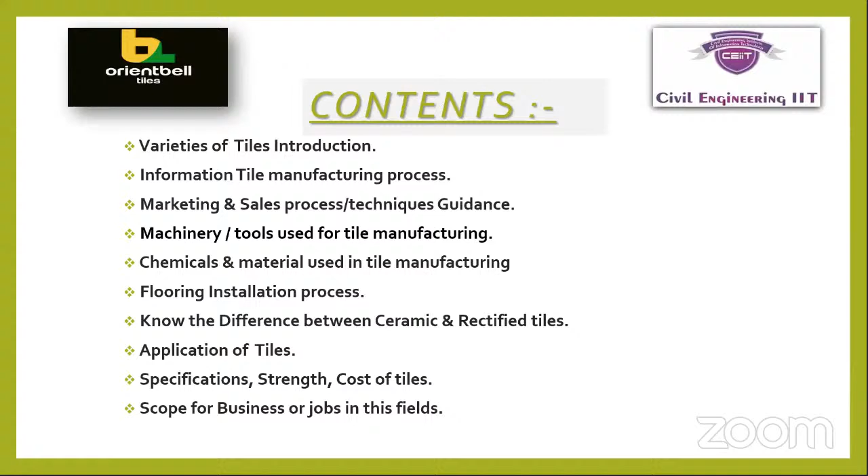We have a lot of students or learners in our institute, so they wanted to know what is the scope in this field for jobs or business. So we need your proper guidance, sir. So let's start the webinar here.

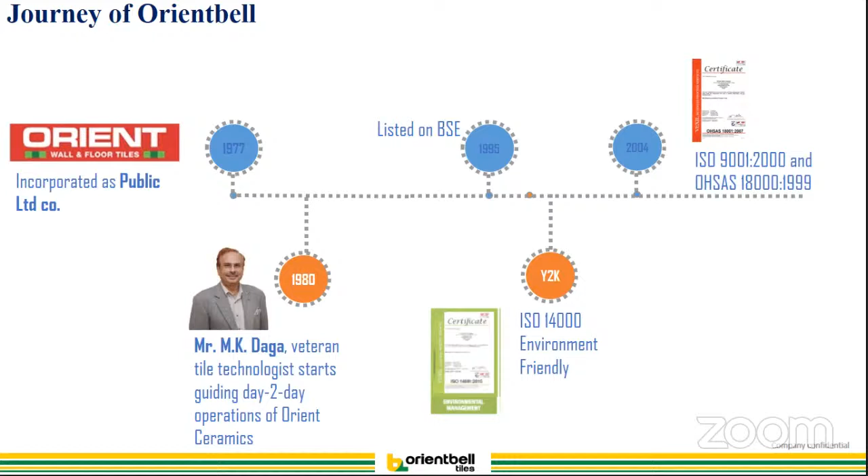So, Orient Company started in 1977. In 1980, our chairman, Mr. M.K. Daga, took control of the entire operations of the manufacturing plant, which is located in Sikandrabad, near Noida. In 1995, we listed our company on the BSE Sensex. In 2000, we were certified for ISO 14000, the environmental policy. In 2004, we were certified for ISO 9001 and OHSAS. These are the quality certifications.

And in 2005, we started our company-owned tile boutique. It is for the display of the tiles and from a sales perspective. Now we have almost 150 plus of these as well. In 2010, we, as Orient, acquired Bell company. Earlier, it was Orient Tiles Limited. Now it is Orient Bell Limited after the acquisition. In 2015, we certified our manufacturing process and product for ISI specifications, manufactured at the Sikandrabad factory.

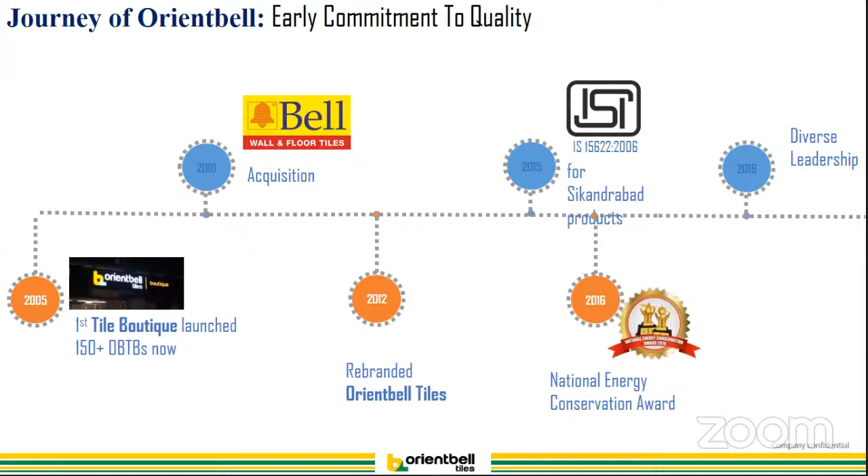So we are certified for quality certifications like OHSAS and ISO 9001. Plus, we are also a GRIHA member, and our product is certified for European export quality (CE). And our manufactured products are certified to Indian Standard specification IS 15622.

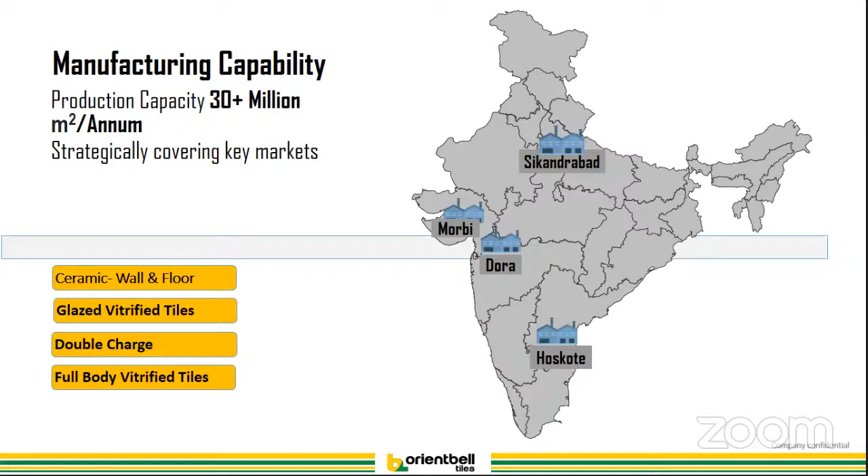So we have 4 manufacturing facilities. One is at Sikandrabad in UP, near Delhi. Second, we have a manufacturing factory at Hoskote. Third, at Dora. And fourth, we have 2 joint venture manufacturing facilities at Morbi. So we are making almost 30 million square meters per annum across all 4 manufacturing facilities. We manufacture ceramic wall, floor, glazed vitrified, double charge, and full body vitrified tiles.

We have almost 2,500 plus channel partners across pan India. We have a strong presence in the north, northeast, and also in the southern part. We have less presence especially in the western area. We are focusing on that part.

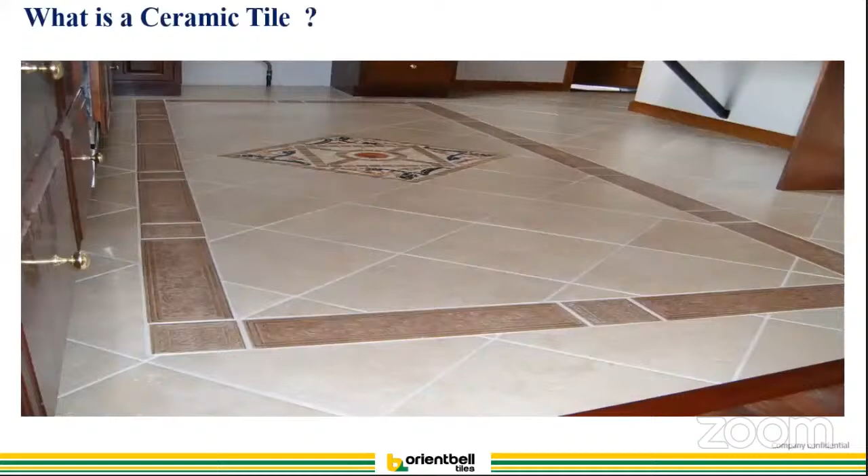So what is a ceramic tile? Everyone knows ceramic tile, but we don't understand what a ceramic tile is. Ceramic tile is actually a thin slab made of a mixture of clay and minerals, compressed at high pressure, then fired at a higher temperature, the surface applied with a glaze and decorative printing, and then fired to acquire the required strength. So this is the basic understanding. Ceramic tile is actually made of clay minerals, so it is a synthetic material, we can say.

Normally everyone compares it with stone or natural marble. But we cannot compare tile and marble or natural stone, because both are different. Marble and stones are basically earthy materials available in nature, whereas ceramic tiles are manufactured from minerals with a synthetic process. So there is a value addition in the process to convert it into a better look in comparison to stone or marble.

So what raw materials do we normally use? In any ceramic tile body, there are 3 major materials. One, clay. There are 2 varieties of clay, ball clay and china clay. Basically, it is a composite of alumina and silica formulations, with a certain water content in the clay minerals. Second, we use feldspar, a non-plastic raw material, again having alumina and silica as base chemical oxide components. And then we use a structural material, silica. Silica is purely SiO2, an oxide-based material.

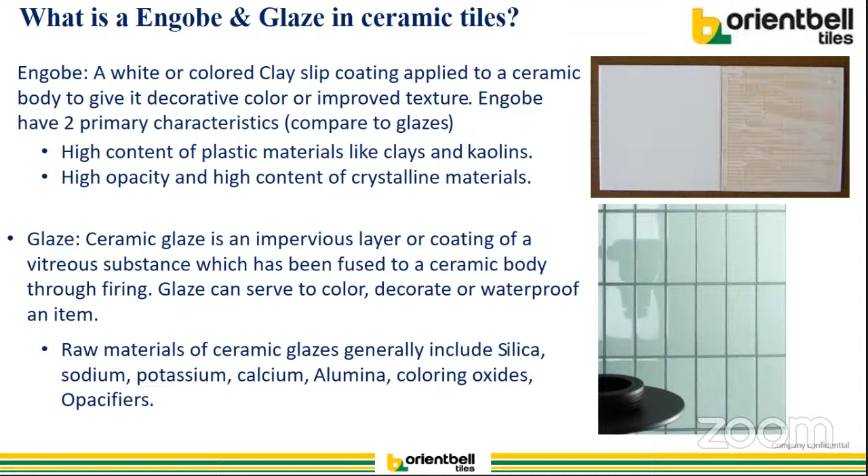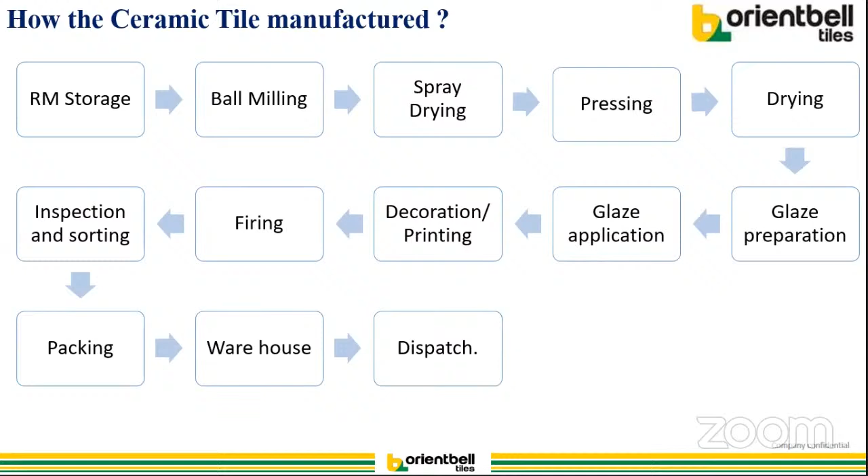Hello, sir. Sorry to interrupt, but you can explain the process in Hindi. It will be more comfortable and understandable for students. Yeah, noted, sir. If any mistakes in Hindi, please excuse me.

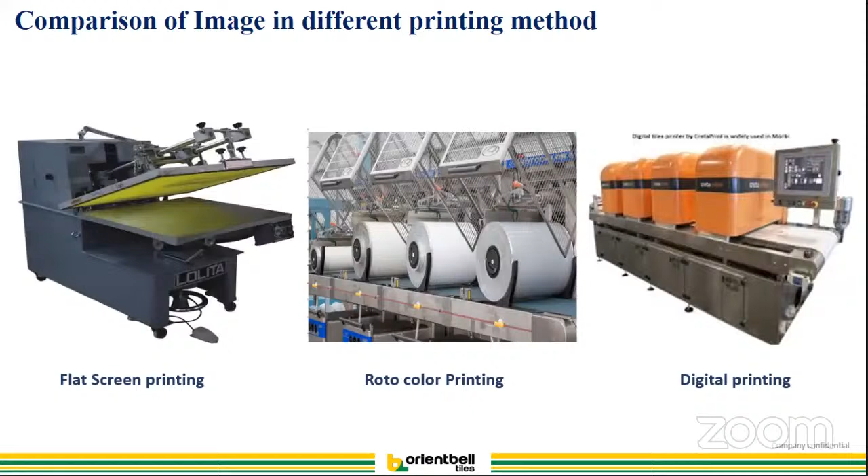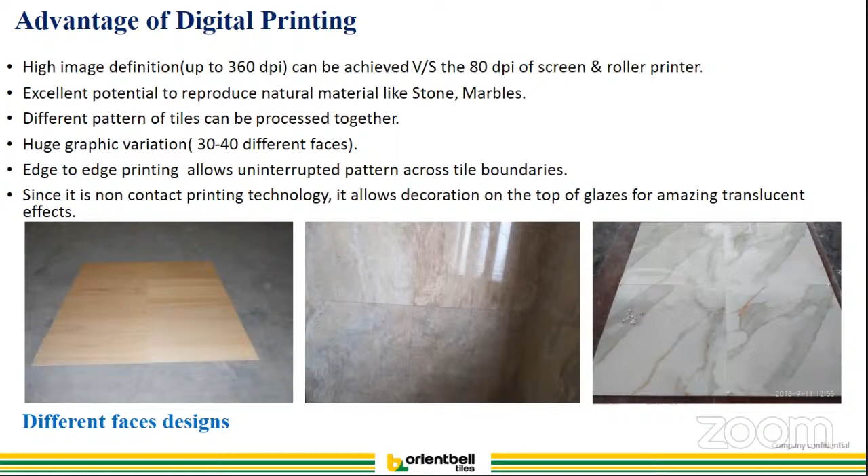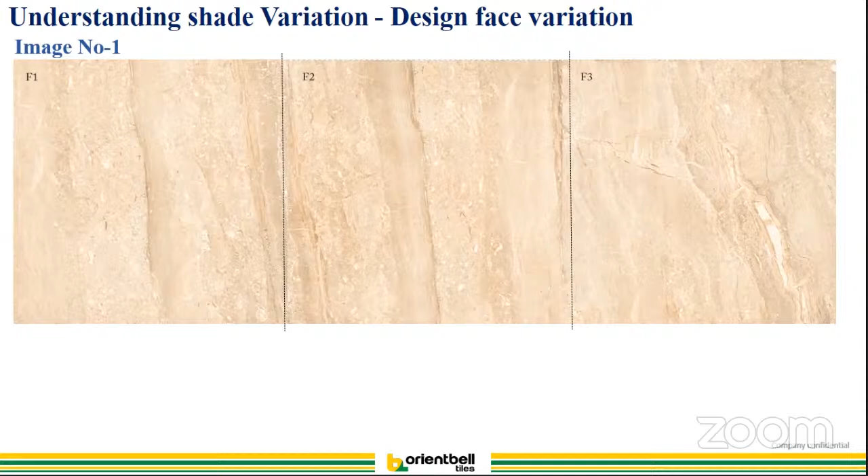बट डिजिटल प्रिंटिंग में आप हर बार एक नया इमेज प्रिंट कर सकते हैं, रैंडमाइजेशन कर सकते हैं, मतलब अलग अलग प्रकार का डिजाइन एट अ टाइम प्रिंट कर सकते हैं। तो वो एक एडवांटेज है। इसलिए टाइल्स में जो फेस वेरिएशन या रैंडमाइज्ड डिजाइन्स कहते हैं, वो एक पैटर्न मेजरली डिजिटल प्रिंटिंग का एडवांटेज रहेगा।

ये इमेज आप देख सकते हैं। इसमें भी आपका डिजाइन है, हर टाइल में अलग है, और हर टाइल में वो जो डिजाइन का पैटर्न है वो मूव कर रही है। इसको रैंडमाइज्ड पैटर्न कहते हैं।

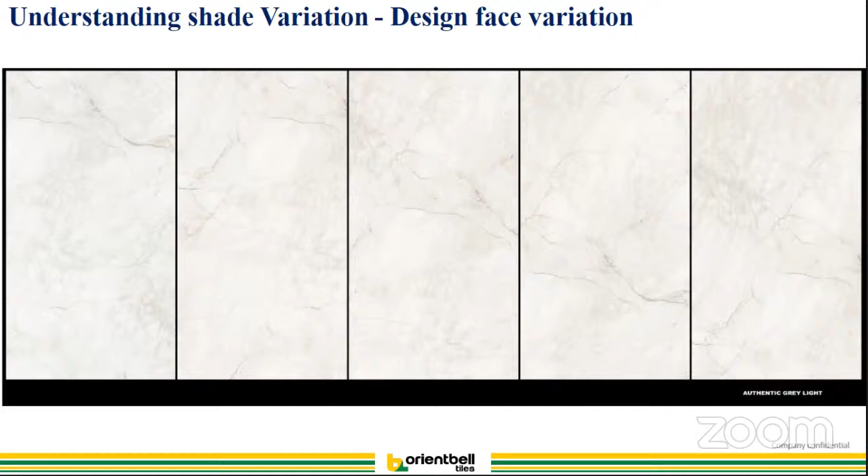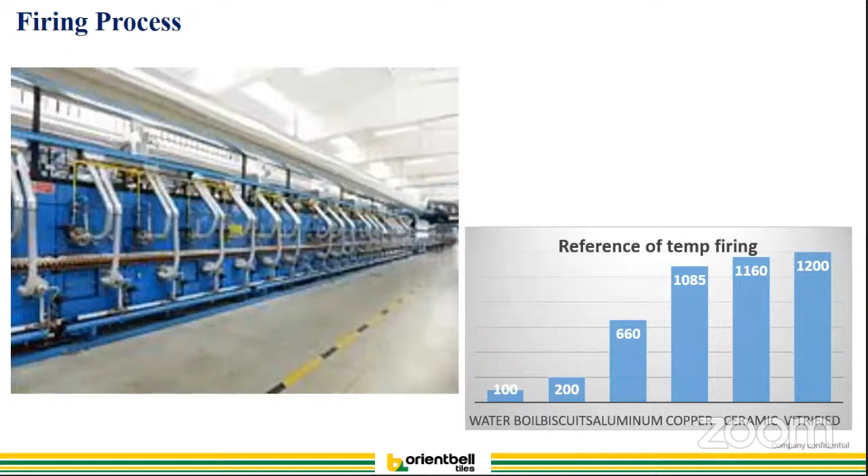दूसरा, जब टाइल प्रिंटिंग हो गया होने के बाद ये आगे फायरिंग के लिए जाएगा। फायरिंग के लिए किस टेम्परेचर पे जा सकती है - वॉल टाइल के लिए अलग टेम्परेचर है, सिरामिक फ्लोर टाइल्स के लिए अलग टेम्परेचर रहेगा, विट्रिफाइड टाइल्स के लिए अलग है, ग्लेज विट्रिफाइड टाइल्स का अलग है, क्योंकि जो भी रॉ मटेरियल यूज कर रहे हैं, जो फॉर्मुलेशन के हिसाब से प्रॉपर्टीज चाहिए।

वो प्रॉपर्टीज अटेन करने के लिए ये टेम्परेचर करेंगे। जैसे मैंने थोड़ी देर पहले भी कहा था, विट्रिफाइड ट्राइएक्सल बॉडी फॉर्मुलेशन में कम से कम 100 डिग्री से लेकर 150 डिग्री तक टेम्परेचर फ्लक्चुएशन मदद करेगा। जैसे जैसे टेम्परेचर इंक्रीज करेंगे, फॉर्मुलेशन के हिसाब से अपना बिहेवियर भी चेंज होता रहेगा। इसलिए इसमें प्रिसाइजली अलग अलग टेम्परेचर, अलग अलग टाइल के लिए यूज करते हैं।

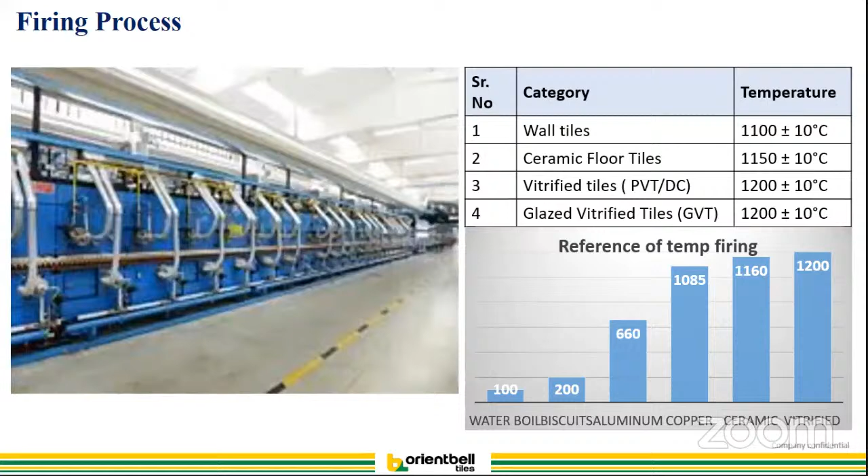जब टाइल किलन से बाहर आ जाते हैं, उसके बाद हम सॉर्टिंग लाइन पे भेजते हैं। सॉर्टिंग लाइन पे एक साइजर रहेगा, एक प्लानर रहेगा। साइजर टाइल का साइज ऑटोमेटिकली लेजर सेंसर के थ्रू मापेगा और उसी हिसाब से आगे टाइल को सॉर्टिंग करेगा। जो साइज हमारे टॉलरेंस के बाहर रहेगा उसको सेकंड क्वालिटी या थर्ड क्वालिटी में, सेट पैरामीटर्स के क्राइटेरिया बेस्ड पे ऑटोमेटिक सॉर्टिंग करेगी।

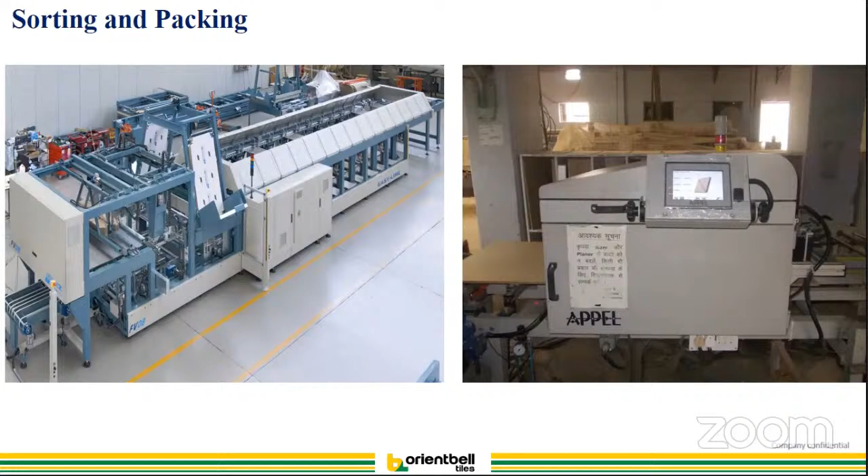इस प्रकार का उसमें डाटा आएगा, साइज आएगा, राइट एंगल्स मेजर करेंगे और डायगोनल भी मेजर करेगा, और पैरेलली इसमें सेग्रीगेशन भी होगा।

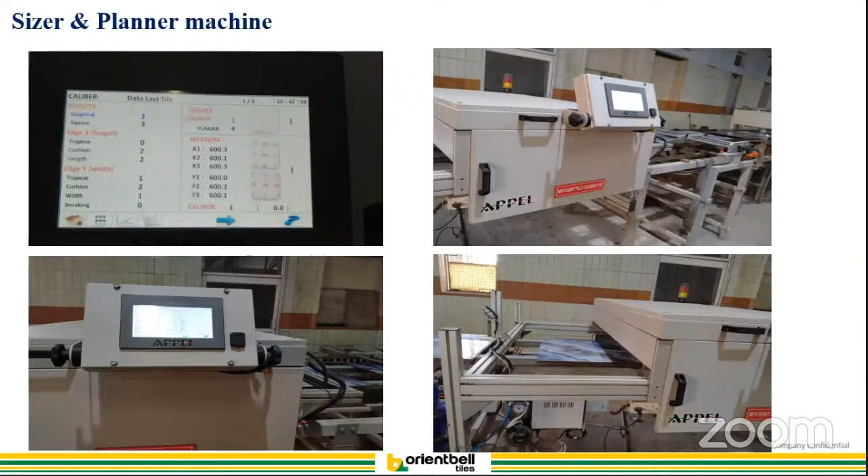इस प्रकार का बैच देते हैं ताकि फ्यूचरिस्टिक हमें बैच वाइज ट्रैक करने में आसान रहेगा। अगर कोई कस्टमर हमें कोई फीडबैक देता है, कोई बताता है इस बैच में ये दिक्कत आई, तो हमें इंटरनली अपना रिकॉर्ड्स वेरीफाई करने, वैलिडेट करने के लिए ये डाटा हेल्प करेगी।

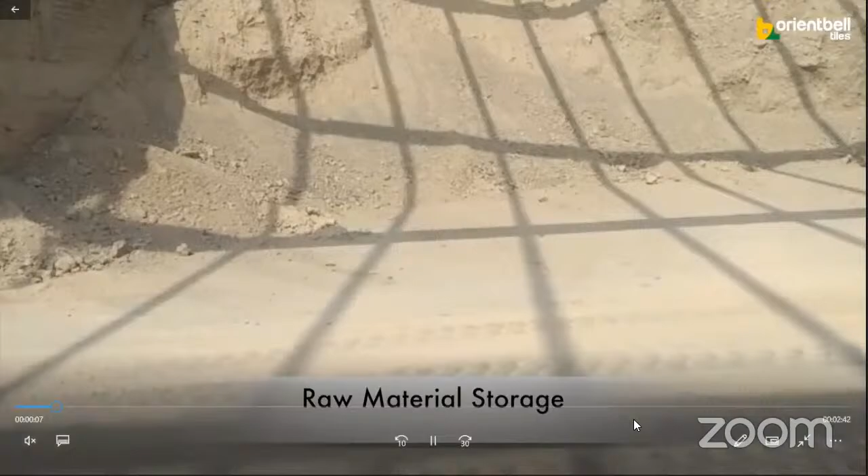आवाज आ रही है? भानु, आवाज नहीं है इसमें। जस्ट जस्ट जस्ट। Bhanu, we can't hear you. Yeah, just a moment, sir.

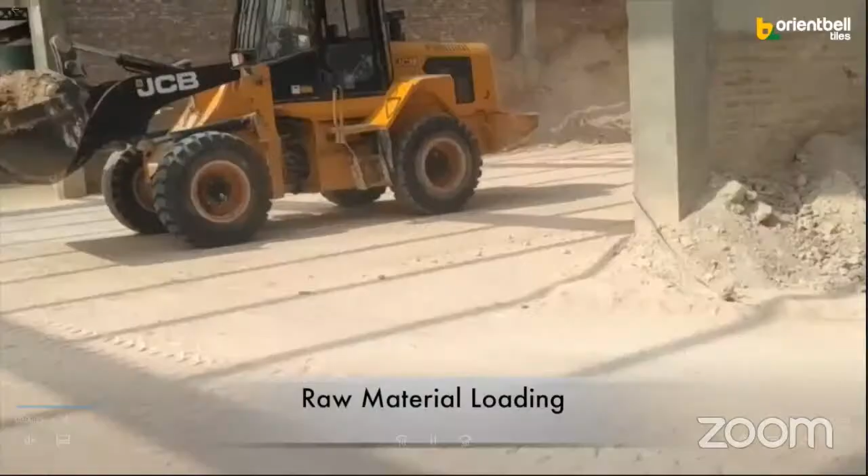I think there's some disturbance in the audio, but I will explain while moving forward.

ये रॉ मटेरियल का स्टोरेज है। इस तरह हम माइन से जो भी रॉ मटेरियल आती है उसको इस प्लेस में स्टोरेज करते हैं।

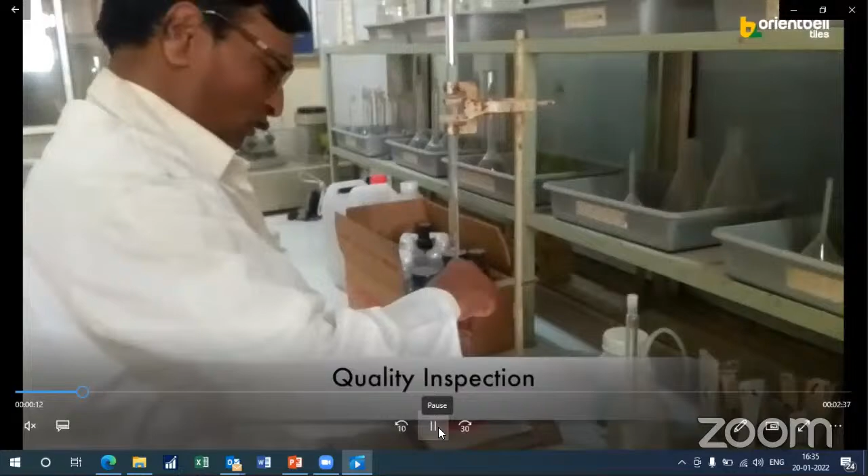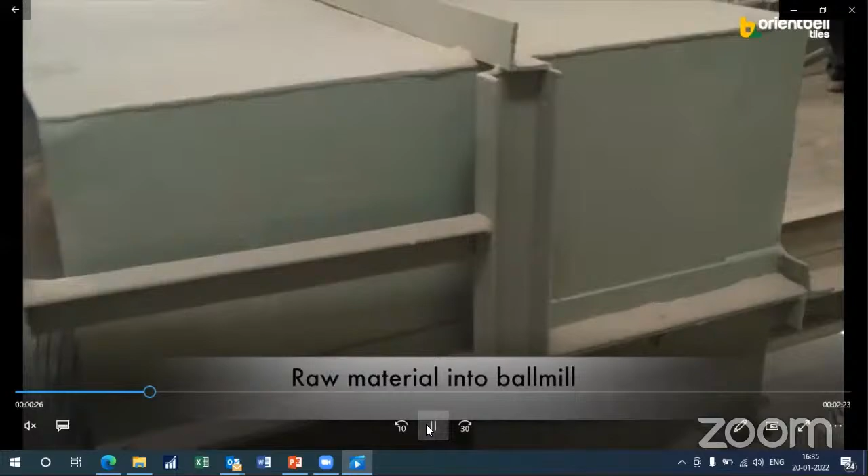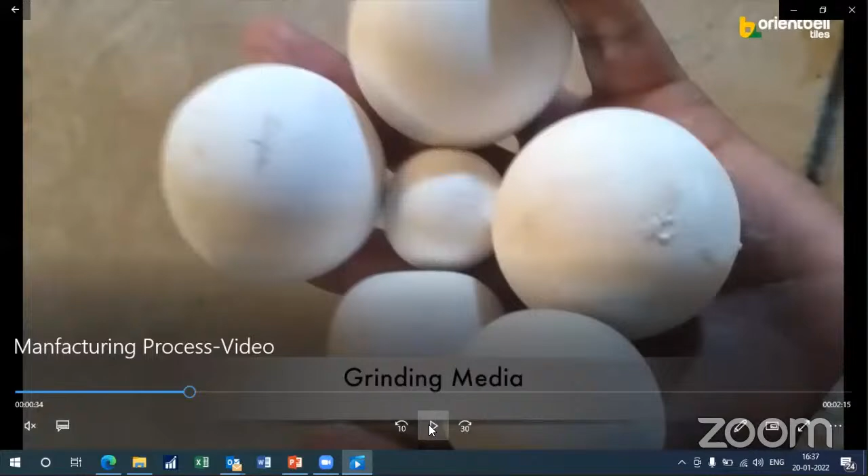और दूसरा, इस तरह का कन्वेयर के थ्रू हम बॉल मिल के अंदर लोड करेंगे। बॉल मिल का, जैसे मैंने बोला था, ये ग्राइंडिंग मीडिया जो बॉल मिल के अंदर रहती है उसको ग्राइंड करने के लिए है।

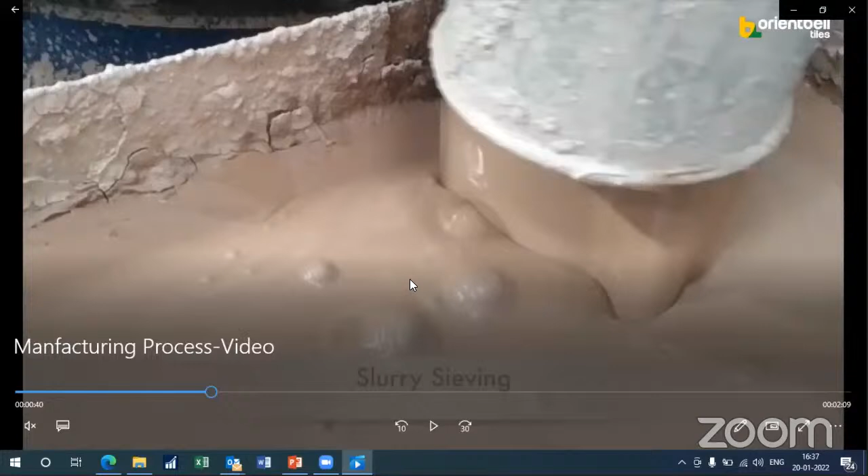जब बॉल मिल से हम डिस्चार्ज कर रहे हैं, डिस्चार्ज करने के टाइम पे इस तरह का स्लरी लिक्विड कंडीशन में रहेगा। अगर आप ये इमेज पे देख रहे हैं, ये सेमी सॉलिड कंडीशन में रहेगा। इसका जो स्पेसिफिक ग्रेविटी है करीबन 1.8 से लेकर 1.9 तक है।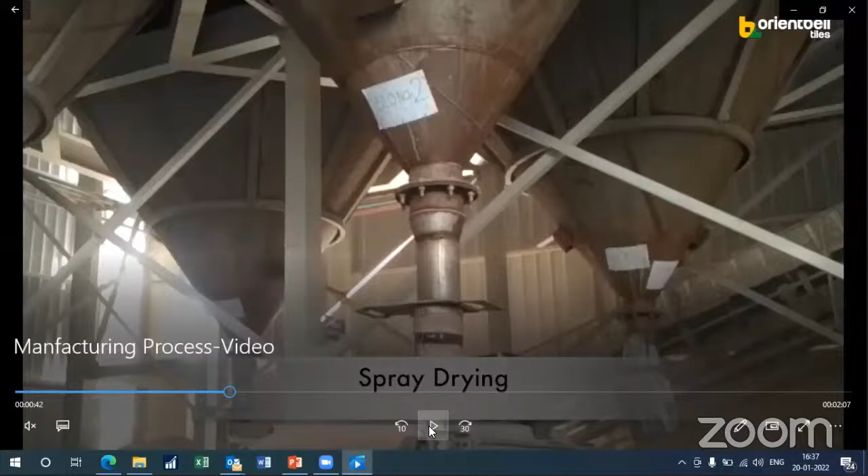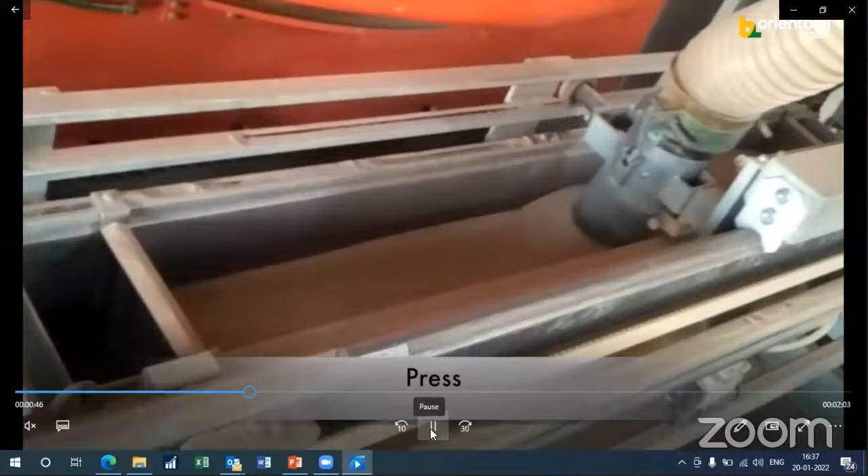ये स्पेसिफिक ग्रेविटी जब आप स्प्रे ड्रायर पे स्प्रे करेंगे अंदर, जैसे आप इधर देख रहे हैं, और ये जो पाउडर है, ये पाउडर फॉर्म में आ रहा है, ये पाउडर डिस्चार्ज हो रहा है, वो पाउडर को हम प्रेस में यूज कर रहे हैं। इसमें जो मॉइस्चर रहेगा, जैसे मैंने कहा था, 5 to 6% का मॉइस्चर रहेगा।

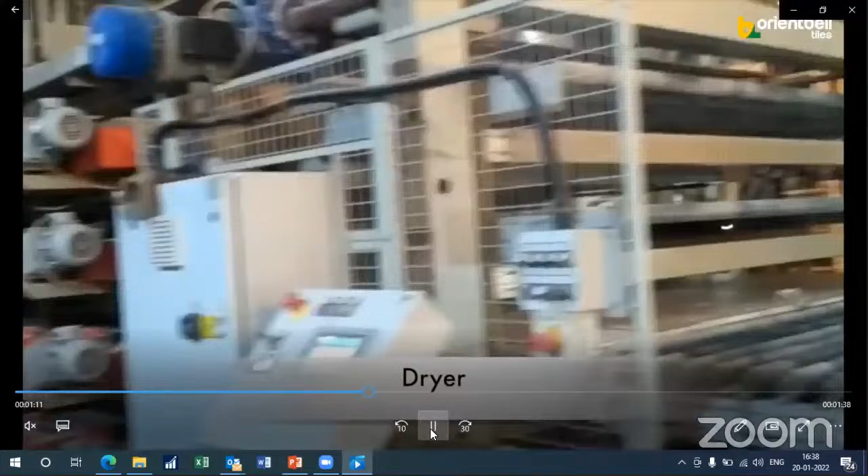ये कैविटी में भरेंगे। जब कैविटी में भर रहा है प्रेस में, और प्रेस से इसको मूवमेंट कर रहे हैं, हाइड्रोलिक प्रेस कॉम्पैक्ट कर रहा है, ये टाइल्स आपका रोलर पे आगे बढ़ रहा है। जब रोलर पे आगे बढ़ेंगे, इसको ड्रायर पे हम दे रहे हैं। इसका टेम्परेचर रहेगा 250 डिग्री तक। और ये जो 5 to 6% का मॉइस्चर है, 1% के अंदर लेके आएंगे विदइन 20 to 30 मिनट साइकिल पे। इसके बाद ये डेकोरेशन पे जा रहा है, ग्लेज लाइन पे।

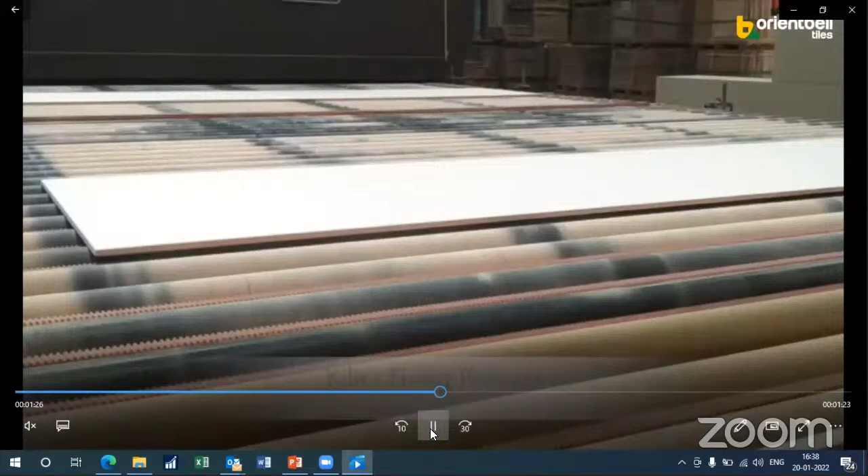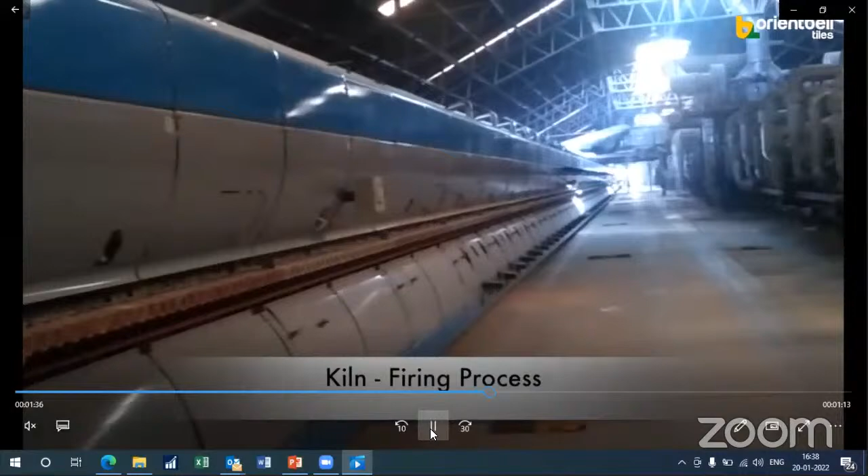जैसे ग्लेज इस तरह का लिक्विड में स्टर करेंगे, और ये किल्न के अंदर फीडिंग के लिए जा रही है। आप रोलर मूवमेंट देख सकते हैं, जो टाइल कैसे रोलर के ऊपर चल रहा है। और रोलर से टाइल बाहर आ गए।

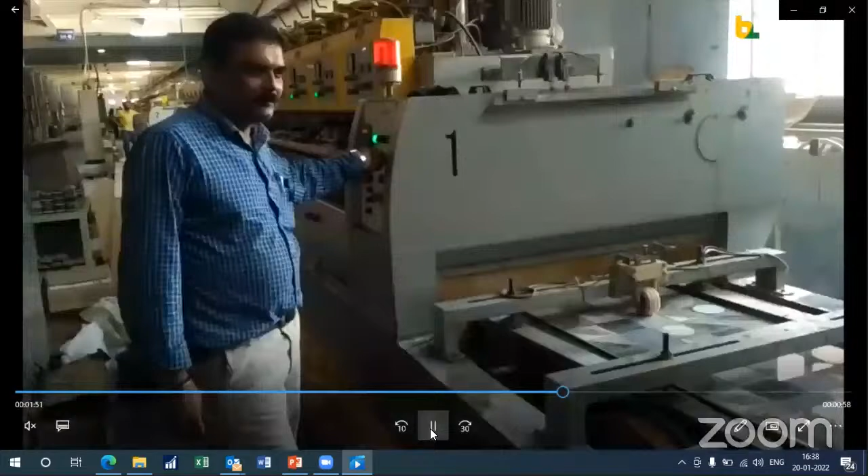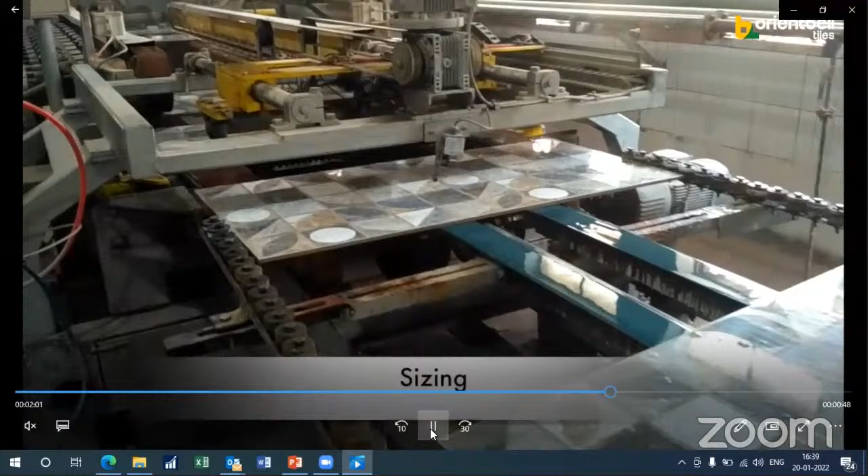ये किल्न का साइकिल करीबन 40 मिनट से लेकर 50 मिनट का रहता है। इट मे वेरी ऑन द प्रोडक्ट टू प्रोडक्ट साइकिल। अब टाइल जो है पॉलिशिंग लाइन पे जा रहा है। इस तरह का हम टाइल सरफेस को पॉलिश करते हैं ग्लॉस लाने के लिए। और उसको टाइल को रेक्टिफाई कर रहा है। रेक्टिफाई मतलब नॉमिनल साइज के हिसाब से टाइल को फिनिशिंग कर रहे हैं।

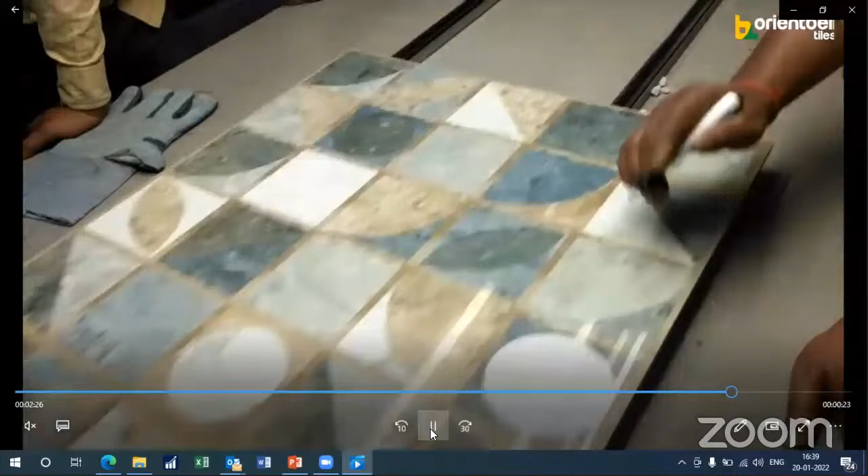जैसे मैंने बोला था, साइजर ऑटोमेटिक सॉर्टिंग करेगा टाइल को, साइज और रेक्टेंगुलरिटी और डायगोनल वेरिएशन को लेके। उसके बाद सरफेस का कोई विजुअल डिफेक्ट होगी, इस तरह का दो आमने सामने सॉर्टर्स रहेंगे, वो मैन्युअली विजुअल डिफेक्ट को सॉर्टिंग करेंगे। इसके बाद जो उसका पैकिंग होगा स्ट्रैपिंग के साथ, और इसको पैलेटाइजेशन करते हैं। पैलेटाइजेशन के बाद थ्रू फोर्कलिफ्ट मटेरियल जो है वेयरहाउस का स्टोरेज और ट्रक लोडिंग पे मूवमेंट के लिए लेके जाए।

ये हमारा मैन्युफैक्चरिंग प्रोसेस है। मैं एक बार इसको रन कर रहा हूँ, ताकि आप लोग एक बार और देख सकें।

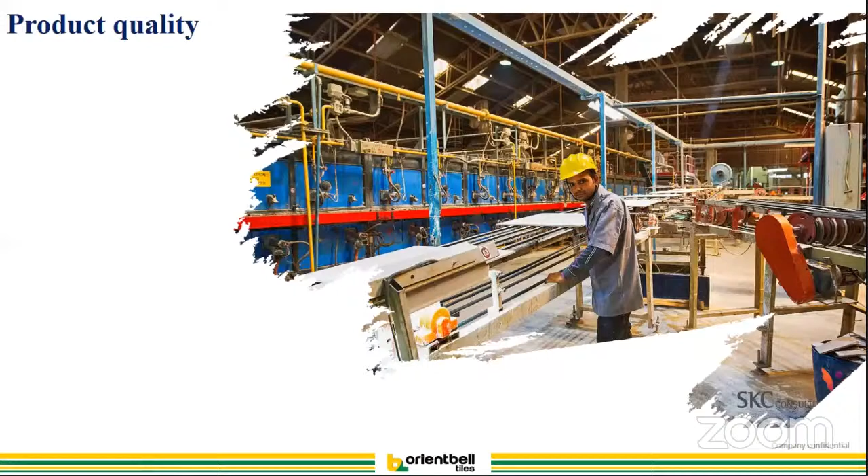सो नेक्स्ट एक इम्पोर्टेंट पैरामीटर है जो टाइल को लेके है, जो मैं कुछ टाइल का क्वालिटी पैरामीटर को लेके बता रहा हूँ, जो हर किसी को जानना चाहिए, ताकि जब भी आप टाइल का परचेज करें या टाइल को किसी को रिकमेंड कर रहे हैं, हम किस बेसिस पे या किस पैरामीटर को लेके टाइल को रिकमेंड कर रहे हैं वो समझना चाहिए।

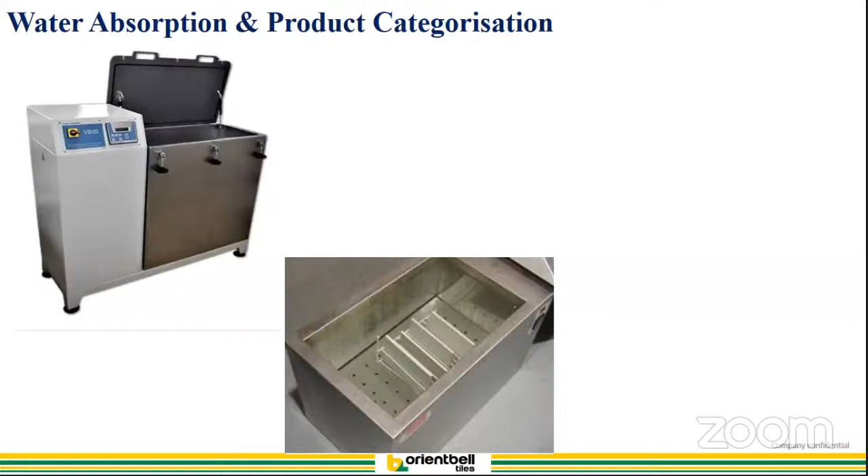तो सबसे फर्स्ट एंड फोरमोस्ट पैरामीटर टाइल में वाटर एब्जॉर्प्शन को चेक किया जाता है। वाटर एब्जॉर्प्शन हम नॉर्मली ऐसे डिफाइन करें, अगर मैं 100 ग्राम का कोई टाइल का टुकड़ा लेता हूँ, वजन करता हूँ और उसको 24 घंटे तक पानी में रखा, और उसके बाद उसमें वजन में क्या अंतर आ रहा है, उसका परसेंटेज को हम डिफाइन करते हैं।

तो उसमें हर टाइल का अलग अलग पैरामीटर है, अलग अलग क्राइटेरिया है। जो हमारा इंडियन स्टैंडर्ड है IS 15622, ये 4 प्रकार का टाइल को कैटेगराइज किया हुआ है। एक है सेरामिक वॉल टाइल, जिसमें वाटर एब्जॉर्प्शन 10% से ऊपर रहेगा, उसको ग्रुप B3 किया हुआ है। उसके बाद आती है सेरामिक फ्लोर टाइल्स, इसमें वाटर एब्जॉर्प्शन 3 to 6% रहेगा, ये ग्रुप B2। उसके बाद सेरामिक पोर्सलाइन और विट्रियस टाइल, जो 0.08% से लेके 3% के बीच में रहेगा।

और उसके बाद आते हैं विट्रीफाइड टाइल्स। विट्रीफाइड टाइल में सबसे कम वाटर एब्जॉर्प्शन होगा और इसका रेंज 0.08 के अंदर रहेगा। इसका ग्रुप जो है वो B1 है।

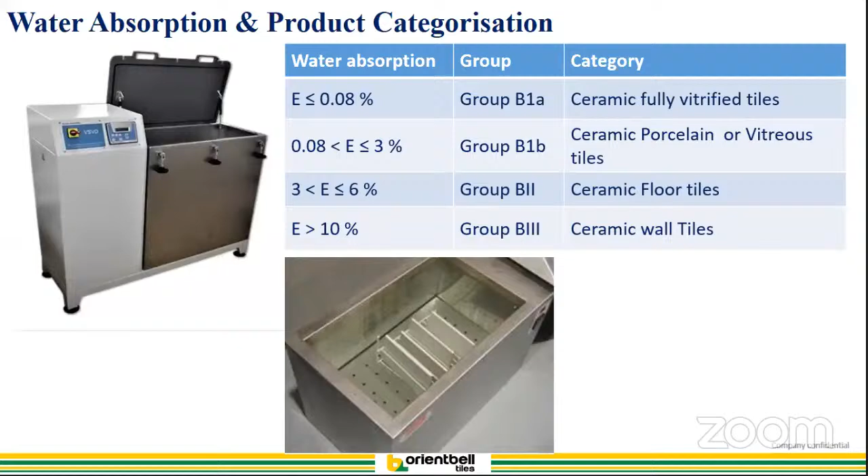उसी तरह मॉडुलस ऑफ रप्चर भी डिफाइन करते हैं, यानी प्रति स्क्वायर mm में कितना लोड टाइल टूटने से पहले ले सकती है। इस टेस्ट में हमेशा जो लोएस्ट टाइल थिकनेस होगी उसको हम कंसिडर करते हैं।

यह पैरामीटर नॉर्मली डिपेंडेंट है जहां आपका लोड इंपॉर्टेंट है, जैसे टाइल को इंस्टॉलेशन मशीनरी, इक्विपमेंट या पार्किंग के लिए यूज करें। उस सर्टेन एरिया एप्लीकेशन के हिसाब से यह इंपॉर्टेंट पैरामीटर है। आमतौर पर घर में लगाने के लिए यह कोई बड़ा मेजर नहीं है, लेकिन इंडस्ट्रियल या स्पेशल एप्लीकेशन के पॉइंट ऑफ व्यू से यह इंपॉर्टेंट पैरामीटर है।

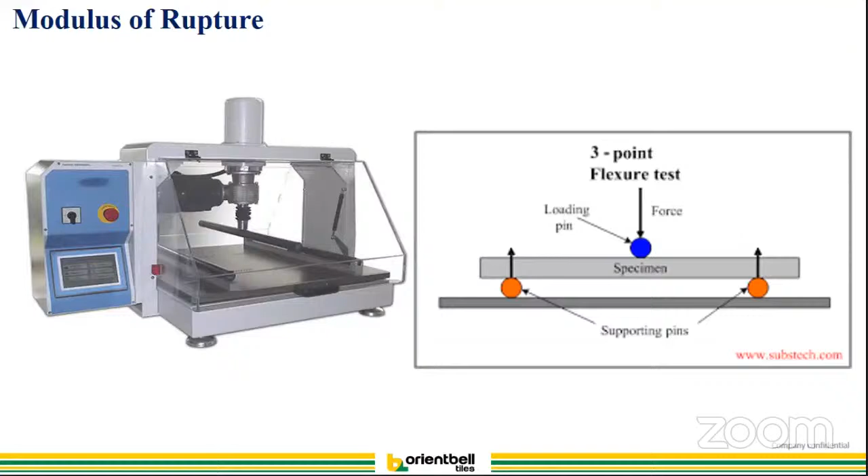एक और पैरामीटर है जिसे मोस्केल हार्डनेस कहते हैं। टाइल की सरफेस जो हमने ग्लेज डिफाइन की है, उसके ऊपर कौन सा मिनरल स्क्रैच क्रिएट करेगा, उसका एक स्केल है। यह 1 से 10 तक का स्केल होता है। नेचुरल मिनरल्स जो अर्थ में मिलते हैं, वो ग्लेज सरफेस पर स्क्रैच बना पाएंगे या नहीं, उसके अगेंस्ट यह स्केल अराइव करते हैं।

नॉर्मली जो ग्लॉस सरफेस है, मतलब ज्यादा शाइनिंग वाला, वो जल्दी स्क्रैच बनाएगा। जो मैट सरफेस है, शाइनिंग नहीं है, वो थोड़ा लेट स्क्रैच बन पाएगा। इसलिए ग्लॉसी टाइल्स को हम नॉर्मली मोस्केल 3 to 4 के बीच रखते हैं, और मैट टाइल्स को नॉर्मली 4 to 6 के बीच डिफाइन करते हैं, जो जनरल मार्केट में अवेलेबल प्रोडक्ट्स हैं।

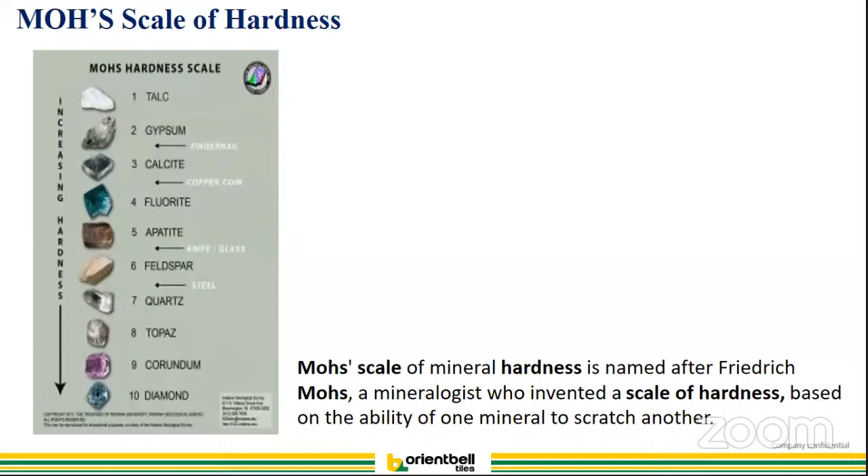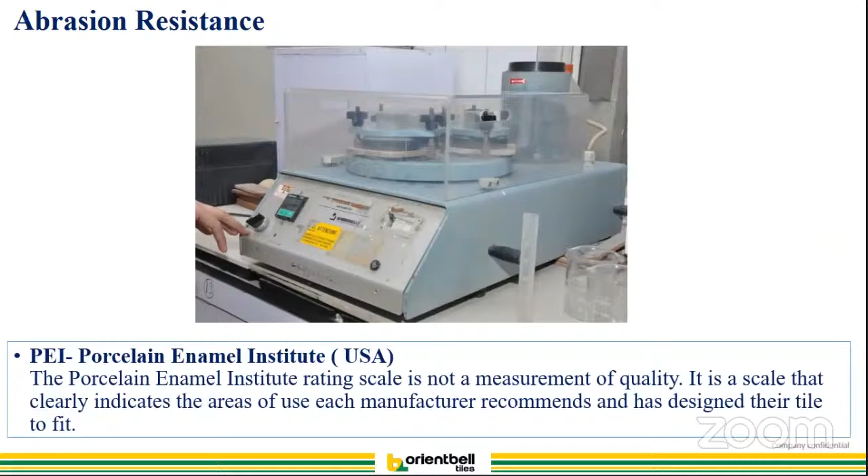उसके बाद एक और इम्पोर्टेंट पैरामीटर है PEI वैल्यू, जिसे अब्रेजन रेजिस्टेंस कहते हैं। अब्रेजन मतलब जो टाइल यूज कर रहे हैं उसकी लाइफ कितनी है, उसके ऊपर सरफेस ग्लेज उसको कितना रिटेन कर पाएगी, या जो डिजिटल प्रिंटिंग है वो कितने दिन रिटेन कर पाएगी, यह टेस्ट करने का तरीका है। इसे पोर्सलाइन एनामल इंस्टीट्यूट ने डिफाइन किया। इसका एक स्केल है जिसमें नंबर ऑफ रिवोल्यूशंस होती है, और हम ग्राइंडिंग मीडिया के रूप में एल्यूमिना यूज करते हैं।

यह एक टाइप ऑफ डिस्ट्रक्टिव टेस्ट है। जैसे आम तौर पर टाइल की लाइफ कितनी है हम नहीं बता पाते, तो उसे डिस्ट्रक्टिव मेथड से टेस्ट करके डिफाइन करते हैं। हमेशा जो PEI वैल्यू 5 या 4 वाला प्रोडक्ट है, वो हमें चूज करना चाहिए, ताकि उसकी लाइफ ज्यादा रहे और प्रिंट की लॉन्गेटिविटी भी ज्यादा रहे। बाकी जो कम वैल्यूज हैं वो ओनली वॉल एप्लीकेशन के लिए हैं, जहां अब्रेजन कुछ नहीं होगी, ताकि लाइफ और शाइन लॉन्ग टर्म के लिए रहे।

नॉर्मली स्केल के हिसाब से बात करें तो 1 to 3 वॉल एप्लीकेशन के लिए प्रेफर करते हैं, और 4 to 5 फ्लोर एप्लीकेशन के लिए यूज करते हैं।

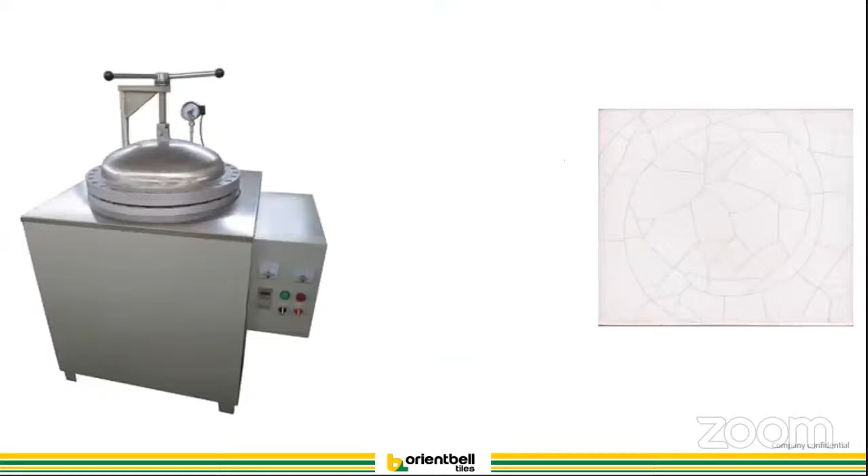किसी भी सेरामिक टाइल के लिए एक और की इंपॉर्टेंट चीज है क्रेजिंग, जो टाइल में एक तरीके का क्रैक जनरेट करती है, क्योंकि उसमें थर्मल एक्सपेंशन कंट्रैक्शन का बिहेवियर होता है जो हमारी बॉडी, ग्लेज, एंगोब में है। अगर इसमें कहीं मिसमैच है तो इनिशियल स्टेज में पता नहीं चलेगा। जब इंस्टॉल किया 2-3 महीने बाद, कभी 6 महीने बाद, कभी 2 साल बाद, उसमें एक अलग प्रकार का अंदर स्ट्रेस जनरेट होगा।

उस स्ट्रेस को लेकर क्रैक जनरेट होती है, क्योंकि हम जो बॉडी, ग्लेज, एंगोब यूज करते हैं उसका थर्मल एक्सपेंशन बिहेवियर कूलिंग साइकिल्स पर इंपॉर्टेंट होता है। इसलिए जब भी टेक्निकली बात करें, ग्लेज फॉर्मुलेशन या बॉडी फॉर्मुलेशन को अराइव करते समय हम उसका थर्मल एक्सपेंशन स्टडी करते हैं, और जो नियरेस्ट बैठता है उसी के हिसाब से फॉर्मुलेशन फाइनलाइज करते हैं, ताकि आगे कस्टमर को यूसेज के पॉइंट ऑफ व्यू से इस प्रकार का डिफेक्ट ना हो।

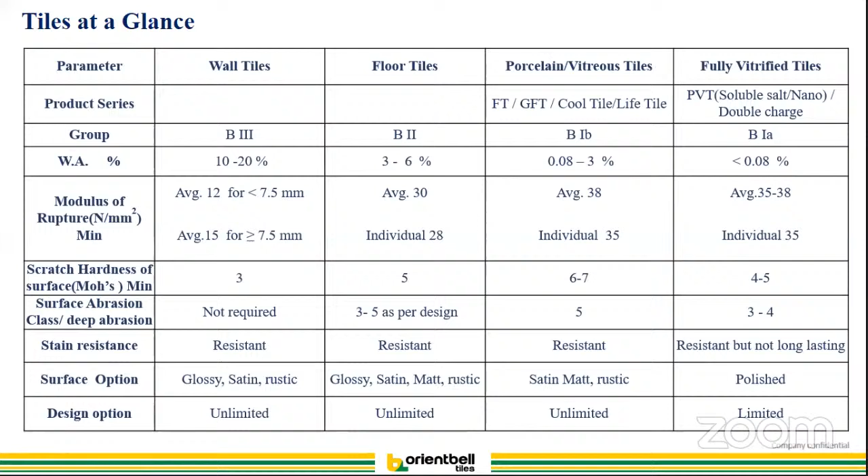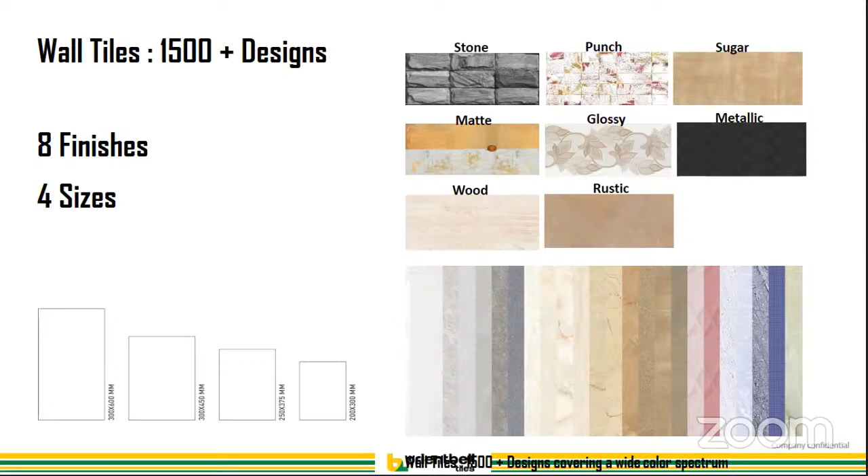Yeah. I'm taking you through the minerals as you listed. Materials. Gagan. Yes, yeah. First. Tell me, sir.

So actually, as I mentioned, we use 3 different mineral categories for the formulation of the body. Body in the sense, जो tile का back side में where you are seeing the actual finish of the body, that we will call the body, which will actually define the product behavior, product parameters, and also the product finish.

इसमें specially body consists of 3 as I told. Again, clay means ये actually जो sedimented clay particles है, जो main clay formulation की point of से बात करेंगे. इसमें Al2O3 alumina, 2SiO2 silica, and 2H2O water. This is the chemical formulation of clay minerals. जो clay minerals को जब हम fire करेंगे, H2O will evaporate, and aluminum and silica, major 2 oxides will form the basic formulation.

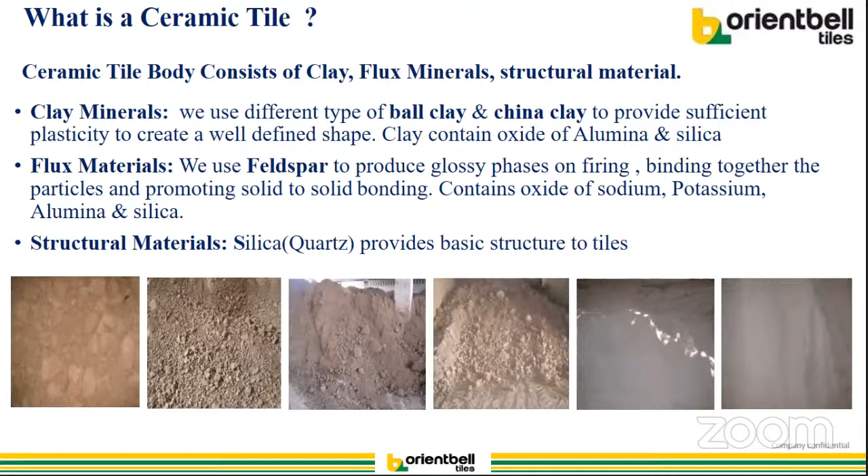Any questions on the manufacturing side? You have explained the process very understandably, so I think no one has further questions. So I request Mr. Nitin Kumar sir, the marketing head. As we now know how the tile is manufactured, we want to know the marketing techniques. I request Nitin sir to share his experience and guide us.

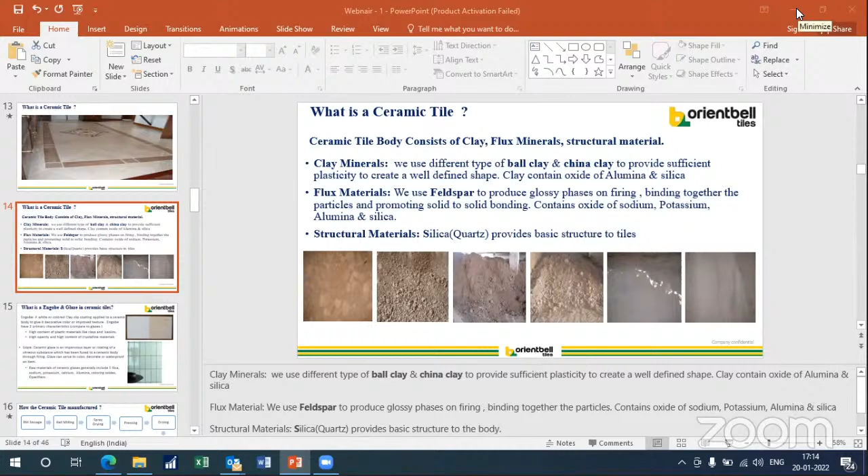Yeah, thanks, Bhanu. Hope my screen is visible to everyone. Yes, sir, it's visible. Okay.

Before I explain the sales process for tiles, let me take you all through a very interesting category in our portfolio called forever tiles. I will mix Hindi and English, because in the chat some students requested Hindi and some want English. So I will use a mix so we all can understand, and explain in the easiest language possible.

Bhanu explained the entire process from clay to the final tile, and that tile finally gets into the market, and our beloved customers purchase those tiles.